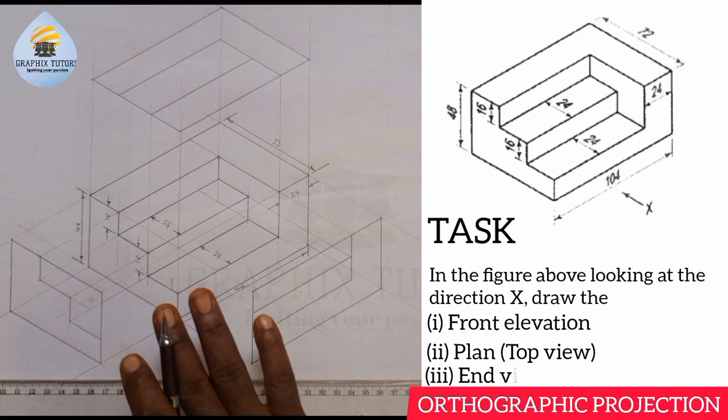In this video, we want to reproduce this figure you're seeing on the screen in orthographic projection. Now, we have already reproduced this figure on the screen in isometric in order to have a clearer view and understanding. Now, we'll be focusing on this particular view here, right?

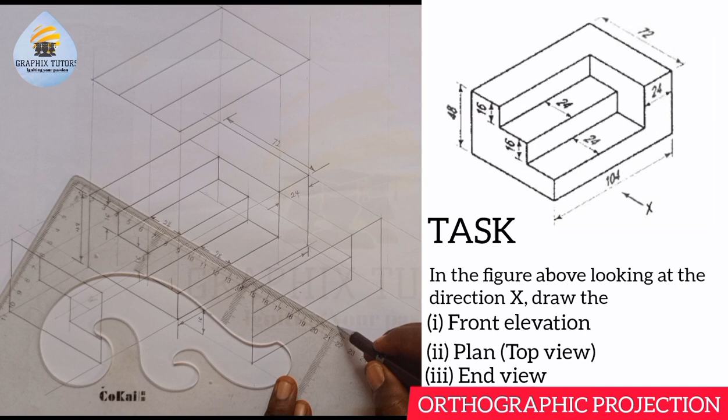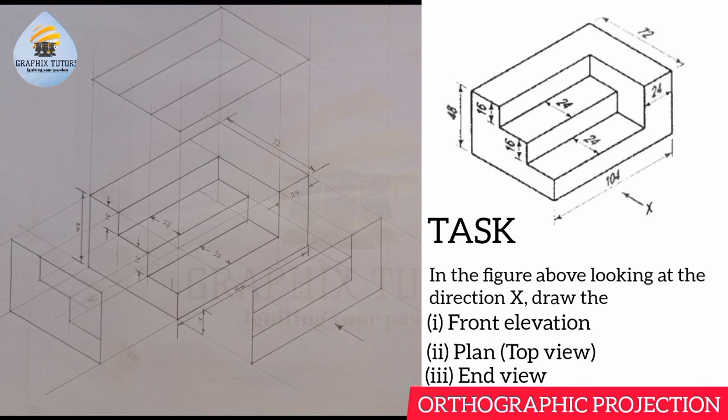Now, we're told to draw this in orthographic projection, right? Looking at the arrow at this what? At this arrow here. We're looking at this arrow, right? We're looking at it from this side. And when you look at this side, they're telling you to look what you see from this dimension here.

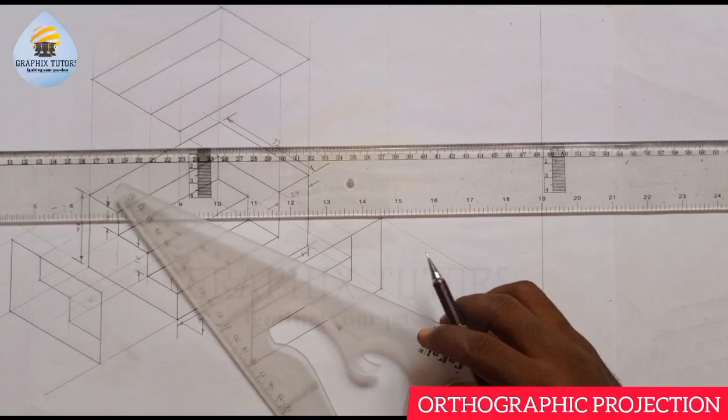So when you're told to draw in orthographic projection, the first thing that you should do is to draw your vertical this way. You can see that. And you draw your horizontal this way, right? You can see that. Now, what you do, you will now measure

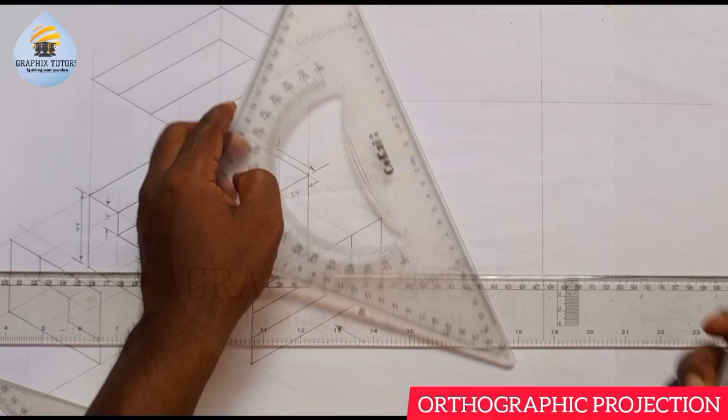5 millimeter to the right and 5 millimeter to the left, right? That means you take your meter rule and you place it, take your compass and you place it and measure. This is 5 millimeter, or you can use 10 if you want to, but I want to use 5. So placing this way, 5, I'll come to this point where they meet, I'll measure 5 to the left, 5 to the right, and we have 5 upward, then 5 downward. This is what I'm going to do.

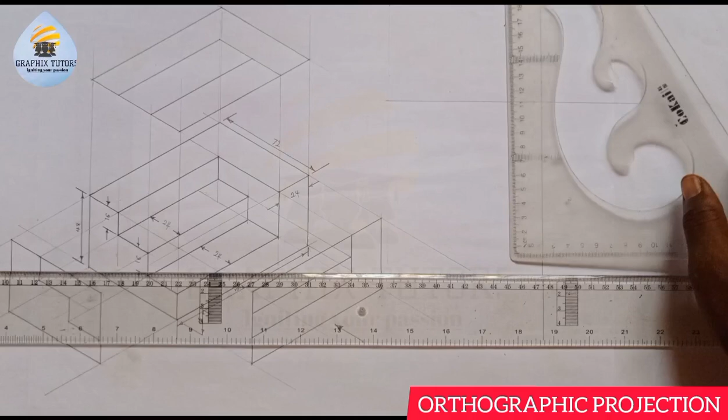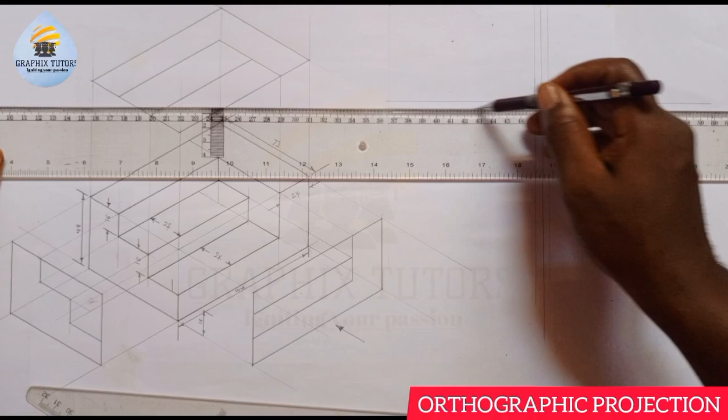So once I've done that, I'll draw a vertical line to pass through those points in this fashion. So I'll place this and I'll draw this. I'll place this and I'll draw this. And I'll take this and I'll draw this. Just faint line. Take this and I'll draw this. You can see that? So this is the first thing you will do when you hear the word to draw in what? In orthographic projection. All together.

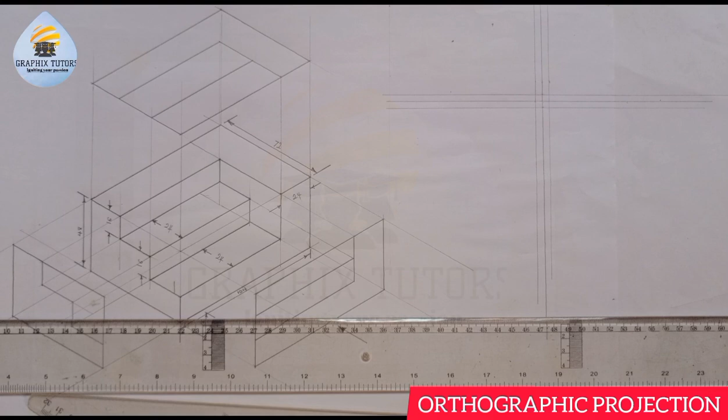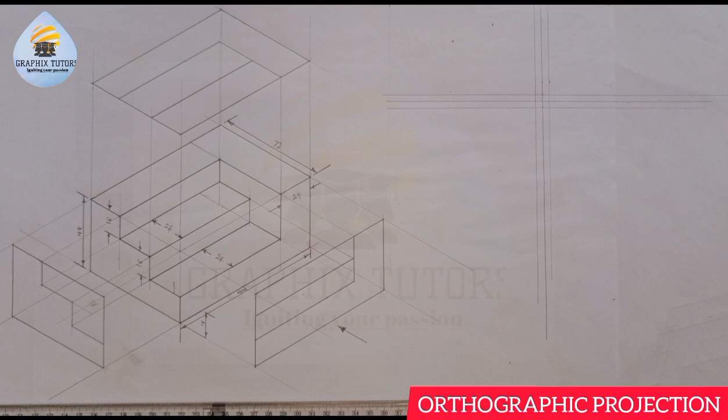Now let's look at something. We are told to draw the front elevation looking from this direction here, right? Now if you look at this direction here, and this is the figure you're considering, this is the figure in isometric. If you look at it, the question is, what are you going to see? Now, drawing the front elevation, if you're drawing the first angle projection, you start drawing from this quadrant, right? I'll call it the second quadrant.

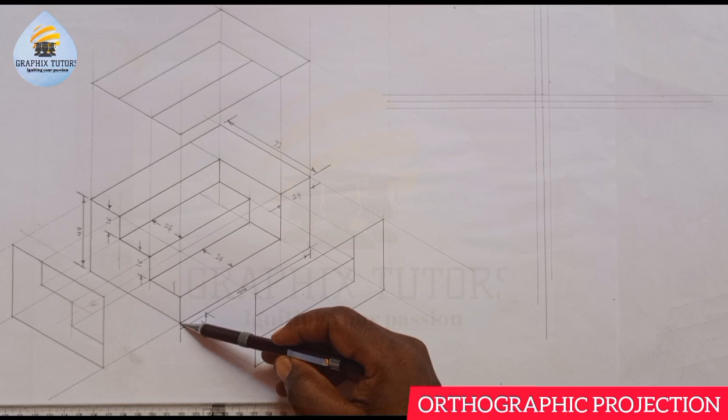So if I should do that, the entire length from here to here is given to be what? 104. So what I'll do is I'm going to measure 104 from this. This is where I will take my measurement from 0, right? This is 100 and this is 104 here, right? And the total height from here to here, which is what? 48. Now measure the total height of what? Of 48. From 0 to what? To 48. This is 40, 45, 48 here.

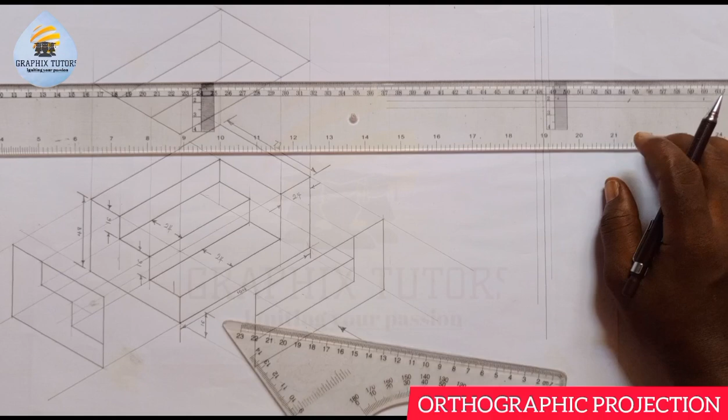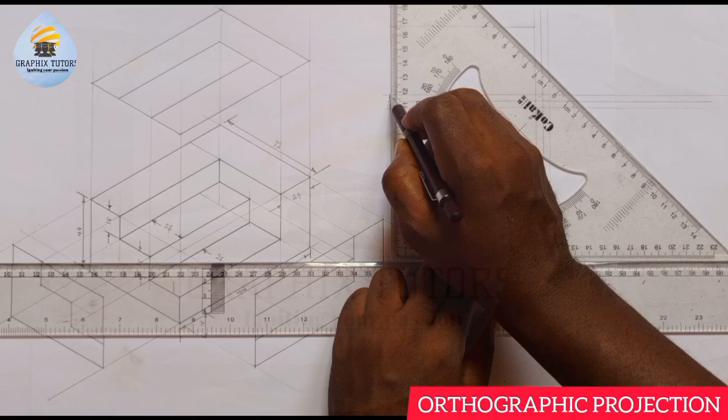All together, and I'll close it up this way. And I'll close it up this way. So this is the plane. Inside this plane we want to draw what we're going to see. Now, if you look from here, right, you see this end point here, which is this end point here. You can see that?

Now, you see from here to here, from here to here, from here to here, you'll be looking as if they are all on a straight line. You consider that they are all on a straight line since you're looking at it perpendicularly from this point. That is why from this point here, you see this point. This point here, you see this point. This point here, you see this point. Why am I not considering this one? Because this point and this point are on the same line. So this one will be blocking this. That's why I'm having only just one point, right?

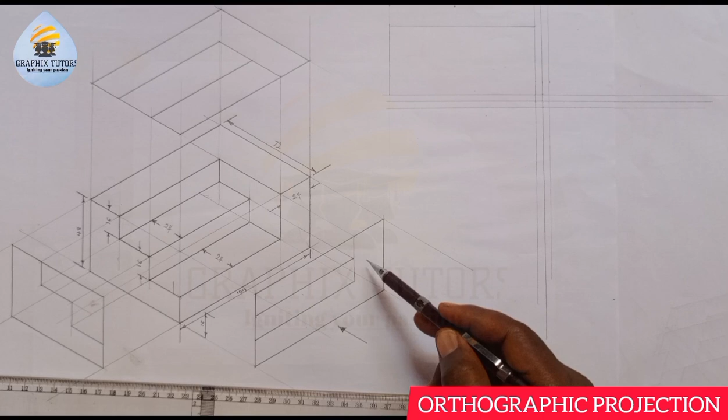This point and this point are on the same line. So this will be blocking this. That is why I'm having this point here. Then this point and this point are on the same line. So this will be blocking this. So I'm having only one point here. Is that okay? So this shape you're seeing, this L shape here, right? Is this L shape you're seeing here. Let me call it A.

And this is A here. Then this rectangular shape you're seeing here. Now this point to this point, right? And this point to this point, together with this point, they will all be on a straight line. You look as if they are all on a straight line. You're looking at it perpendicularly, so that's why I'm putting them on a straight line. This line you're seeing here, from here to here, is blocking from here to here and from here to here. That's why we're having just one straight line here.

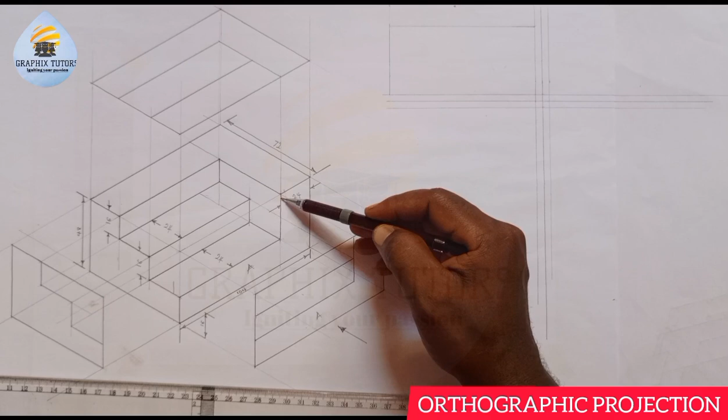You can see that. So I'm having this shape here, from here to this point. So this point is this point, right? So now from here to here, and from here to here, this rectangular figure you're seeing here, let me call it rectangular figure B, and this will be my B here. So if you're looking at it from this side, you're going to see this shape. You will not see the top. You cannot see this point here or this point where 24 is. What you'll be seeing is just A, right?

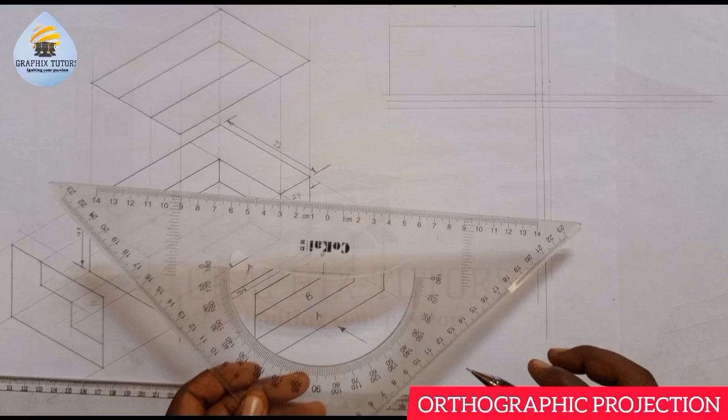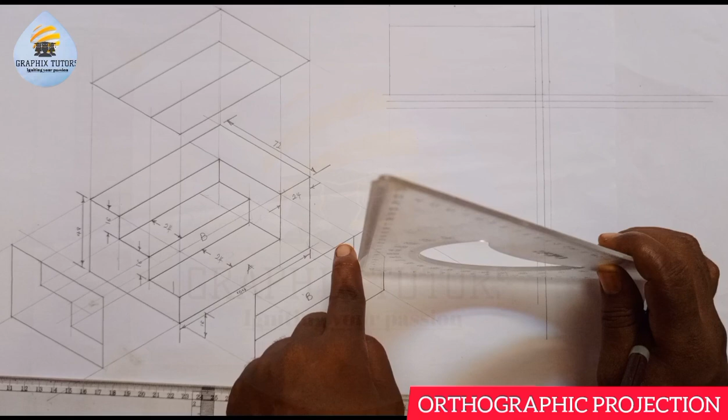Like now, if I'm asking you a question, if you're looking at this ruler from this side, what shape are you seeing? You'll be seeing a triangular shape, looking at it perpendicularly. You'll be seeing this semicircle here, looking at it from the top. Is that taken? But when I place it this way, watch. When I place it this way, this ruler, you're seeing this top here. You cannot see this down here because this top here is blocking this down here.

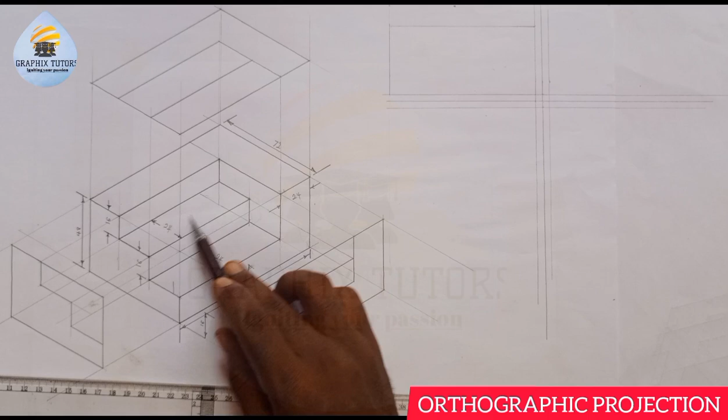So they are all on what? On a straight line. That is how you will be viewing it. Are we together? That is how you will be viewing it. Is that taken? You'll be seeing it that way. So let's proceed. The next thing I'll see here is this rectangular shape here. Let me call it my C. So this is C here.

So I'll be seeing everything here, which is A. I'll be seeing everything here, which is B. I'll be seeing everything here, which is C. Right? Then I'll be seeing this shape you're seeing here, which is what we're seeing here. So remember, everything will be in this rectangle. So this is what I am going to draw here. So you look at from here to here is 104, which is from here to here. That is 104.

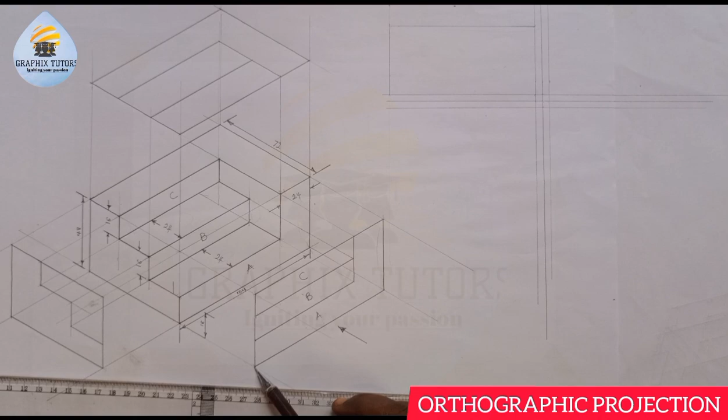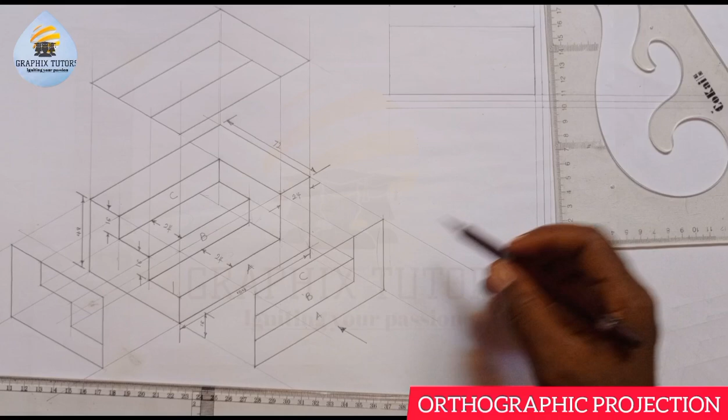So I'm going to take in that point. I'll take in that point. You can see that. Now the next thing is from here to here, which is from here to here, and I'll also take it in. Similarly, from here to here, which I already explained, is from here to this point here, because this and this, this and this, and this and this will appear as if they're on a straight line, right? That's why we're having a straight line. So I'm going to draw the straight line here. I'll take it in, right?

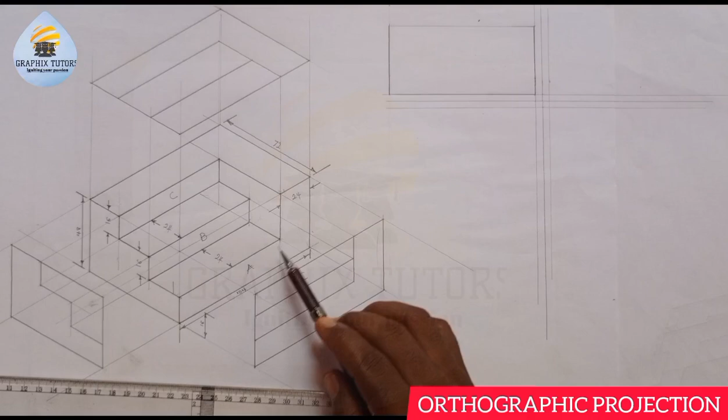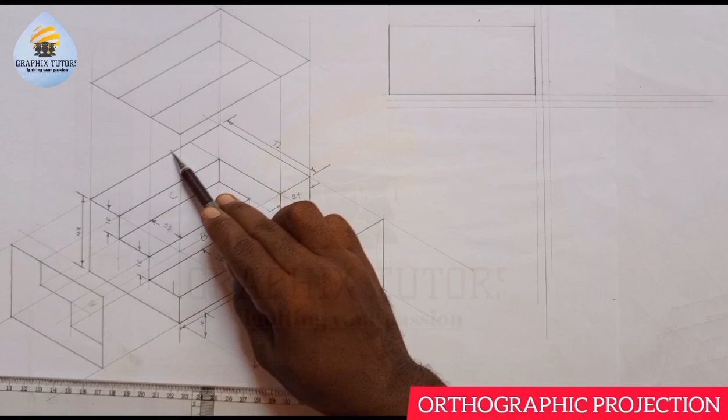Then the next thing is all this line here, from here to here, and from here to here will appear as if they're on a straight line, right? That's why I'm drawing this straight line here. And this straight line here, from here to here, and from here to here, will be blocking everything you have here. So I'm only having just one line because the front line is blocking the back line, right? So I'll just draw it this way. I'll take it in. Still the same thing, just like I explained.

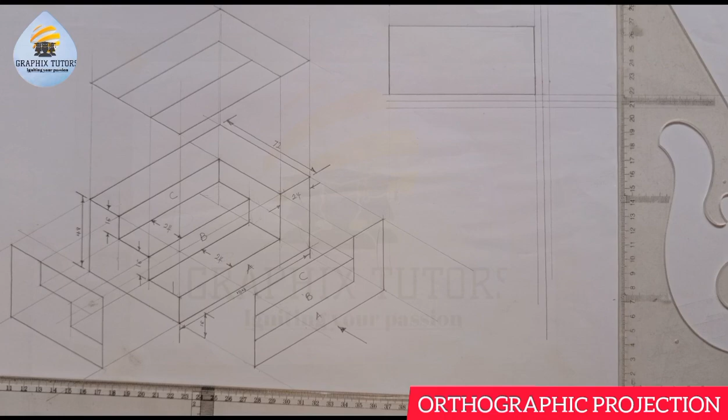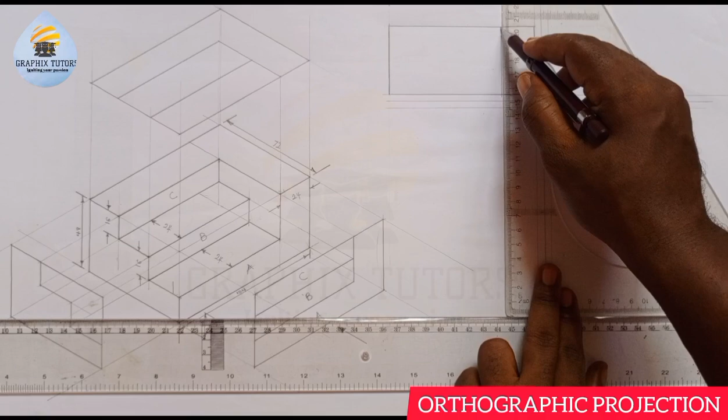You can see that. Now, from here to here is from here to here, and that is 24. So from here, I'll measure 24. If I do that, measuring 24, this is what I am going to be having from 0. This is 20, 24, right? And I'm going to draw a vertical line down. I'll draw a vertical line down, right?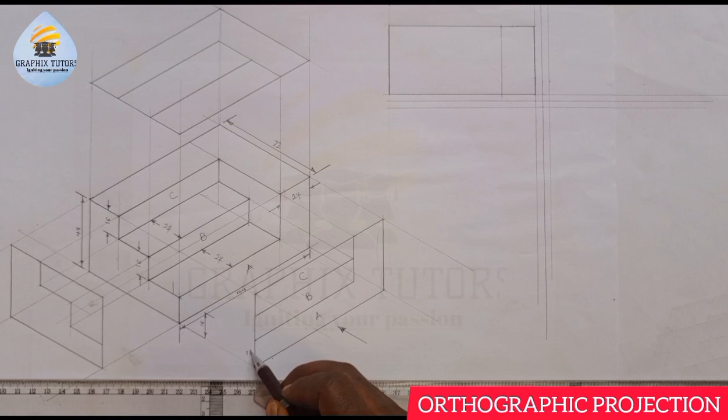Now once I've done that, the next thing is from here to here, which is from here to here, and the thickness is 16. Since from here to here is 48, once you remove 16 and 16, that is 32. 48 minus 32 means from here to here is 16. So from here to here we're having 16. Here to here also 16. Here to here also 16. They're all appearing on a straight line. That's how you'll be viewing them.

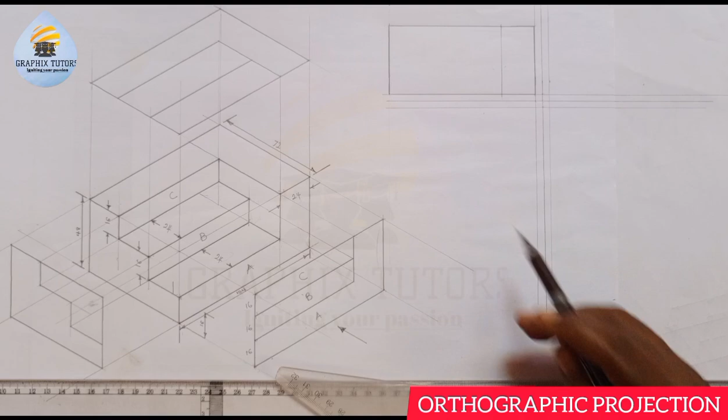That's why this point to this point is 16, and this point to this point is 16, and this point to this point is 16. You put them on a straight line since you're looking at them at a right angle, right? So I measure 16 upward. When I measure 16 upward here, from 0 towards this is 16 here.

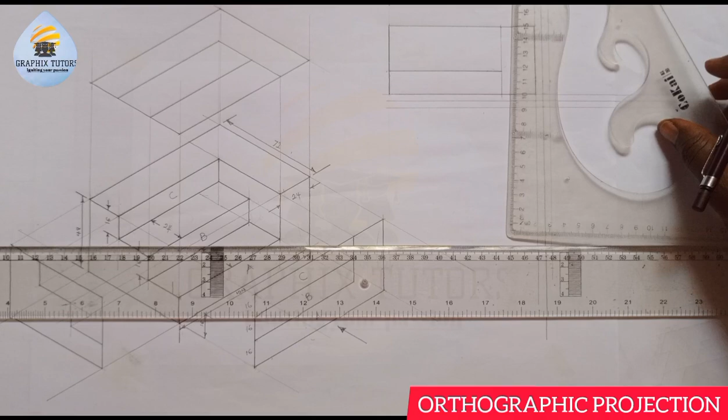You can see that. Then I will now draw my thick line here. From this point, I'll draw this, right? And I'm going to connect this to it from here to here. You can see that. So that is this L shape you see in here. From this point to this point, this point to this point, this to this, versus this to this.

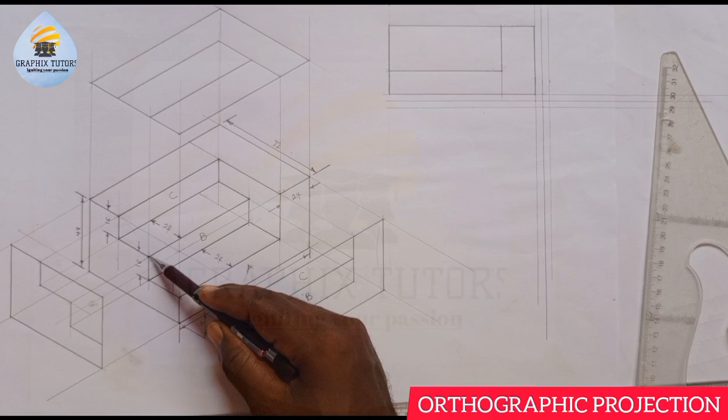Now the next one is again after you measure from here to here 16, from here to here 16, this point and this point is on the same line. So that means from here to here is 16, which is from here to here. So I'm going to measure 16 again. You look as if they are all on a straight line. So from 0 to 16 is here, right? And I'm going to close it up. So this is what we're going to be having here.

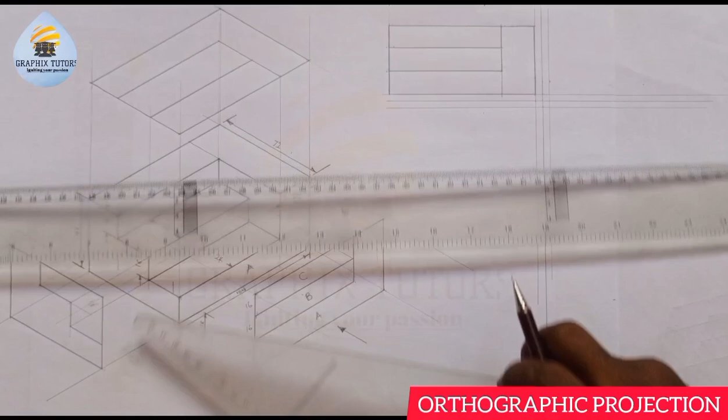Hope you can see that. So this is what we're having here. We have successfully reproduced this figure you see in here. So it's very important for you to bring out your dimension. We know that from here to here is 16, from here to here is 16, and from here to here is 16. The entire height here is what? 48. So you do your dimension. Is that okay now? From here to here is 104, right? And from here to here is what?

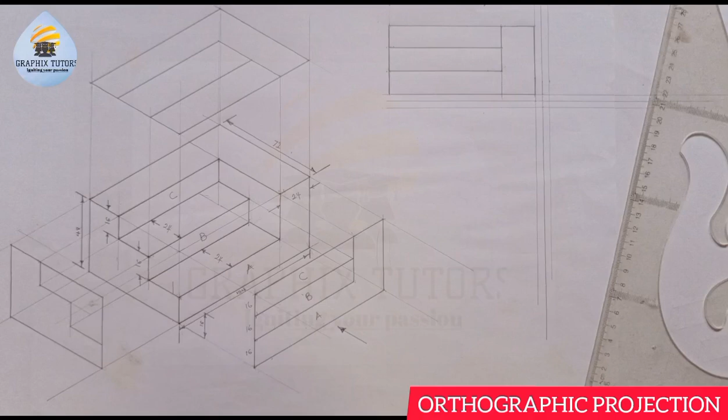24. So let's proceed. So since we have successfully drawn out the plan, the front elevation, looking at the arrow, we are looking at this arrow here. This is what you are going to see. We'll call that point our front elevation. Now the next thing after the front elevation, that is if you are drawing in first angle projection, your front elevation is here. The next thing will be what?

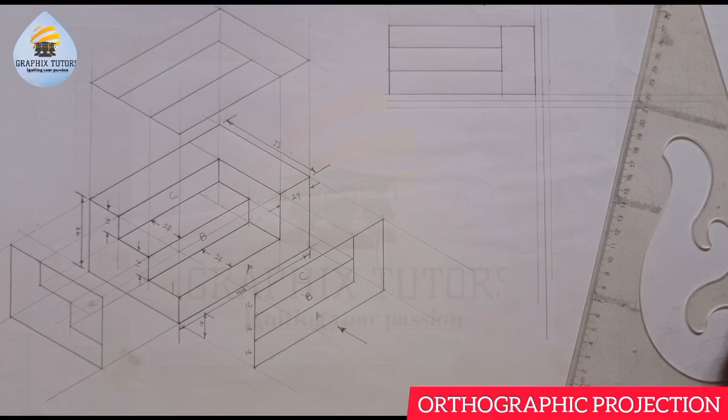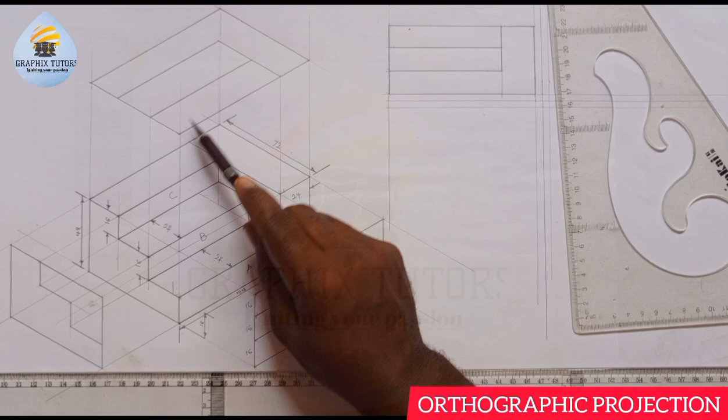The plan. So if we are to draw the plan, what you do is you're going to project this axis out. You project them down, that is this end. This end is already there. Now we know that from here to here is 104, right? Meaning that the plan is looking at it from the top. When you're looking at it from the top, from here to here and from here to here they are both 104. So the length of the plan is the same as the length of the front elevation.

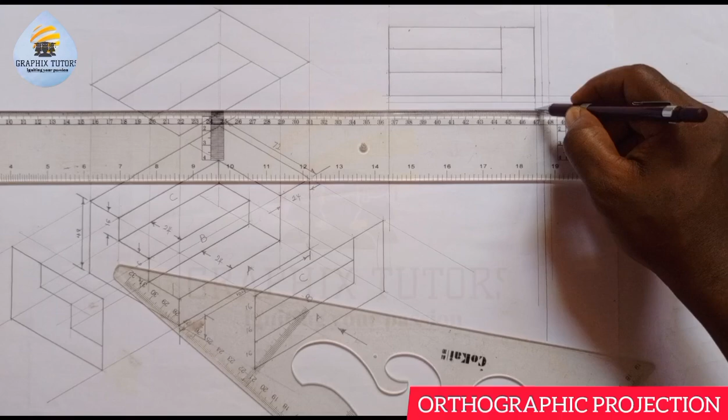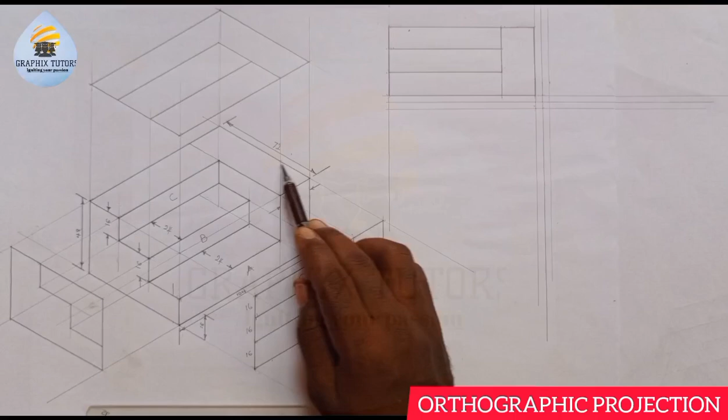So since from this point to this point is thickened, I am going to just thicken this way, or better still, I just draw out my plan. From here to here is 104. Since it's a rectangle and two opposite sides are equal, if from here to here is 104, meaning that from here to here is 104, right? So the other side that we don't have is from here to here, and that is 72. So the height of the plan here is 72, which is the width.

So I'm going to measure 72. So from 0 here, this is 72 here. You can see that. Then I'm going to close it up. So in closing it up, I'll have this way. So this is the rectangle which we want to draw in our shape. What you need to understand is from here to here is from here to here, right? And from here to here is from here to here. And they are all thickened on the four sides.

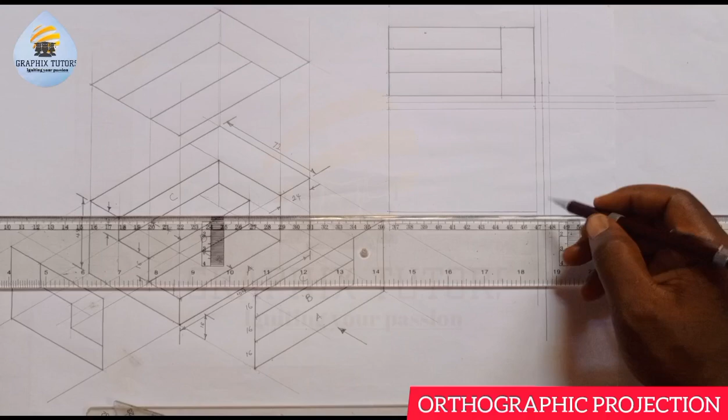So I'm going to draw it. I'll thicken all those four sides here this way. I'll thicken this four side this way. I'll thicken this four side here in this way. Thickening this four side here this way.

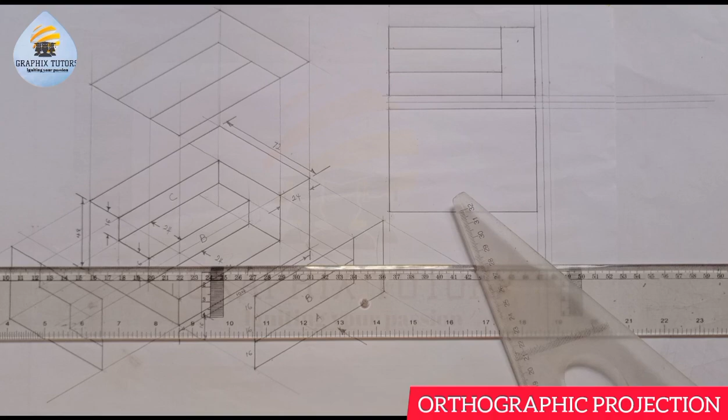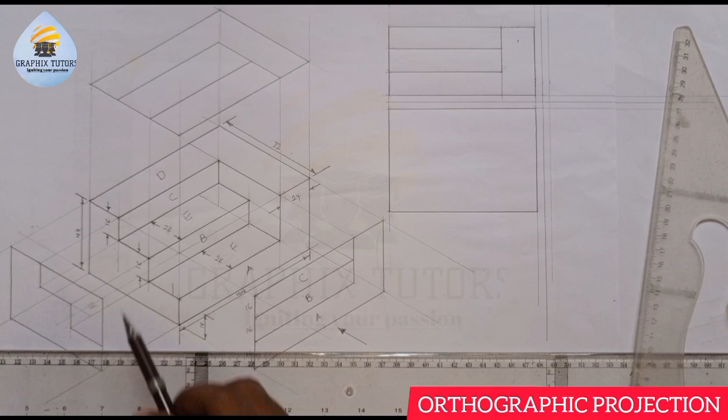Can you see that? Now if you're wondering what am I doing here, looking from the top, what are you going to see? All this side here you're seeing, let's call it D. You're going to be seeing D, right? And all these corners here to here, I'll call it E. All these points here, I'll be calling it F, right?

So what will happen is from here to here and from here to here, we see them as if they're on a straight line. Since you're looking at it from the plan perpendicularly, from here to here is 16. They're on a straight line. So what is the thickness? If from here to here is 24, that is F. From here to here is what? 24.

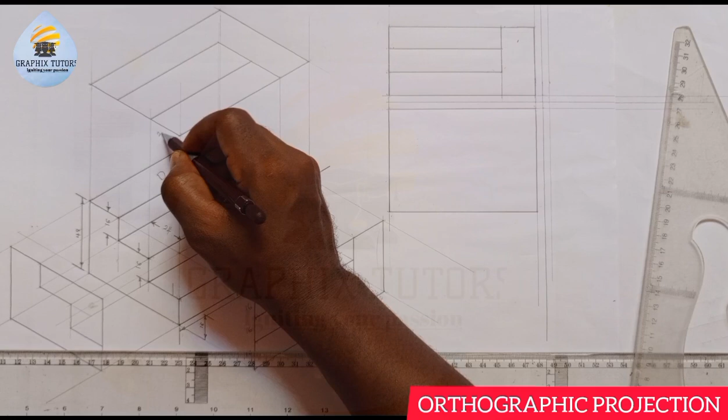The next one also is what? 24. Automatically the third one, which is D, is also what? 24. All together. And here also, from here to here, is also what? 24. You'll be seeing them as if they're on a straight line, right? This one now, from here to here, and from here to here, and from here to here, you see them as if they're on a straight line.

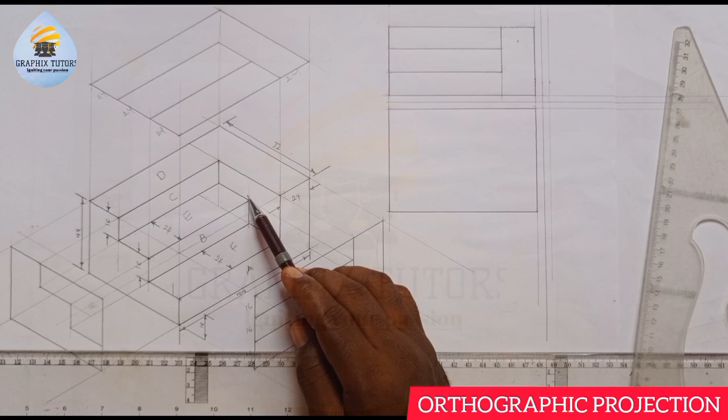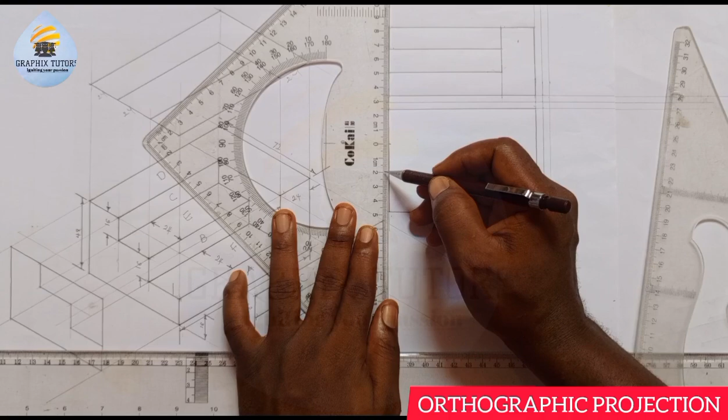So if I want to do that now, I'll just measure 24. That is, from here to here is what? 24. And this end here is this point here. So I'm going to measure 24. So from 0, this is 20, 24. I'll do another 24. From 0, this is 20, 24. And the third one is what?

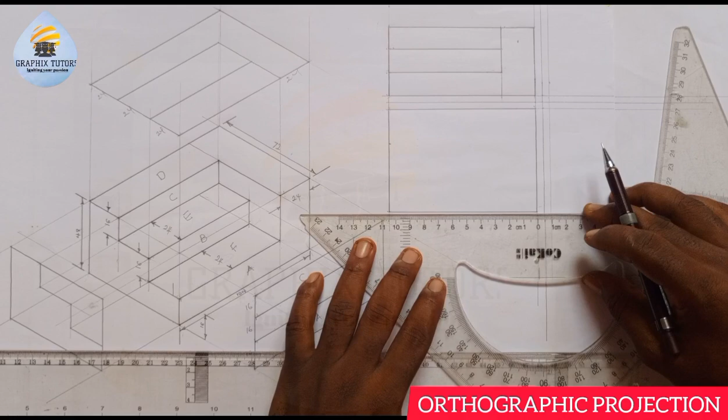Is 24. So what I will do is, I'll just draw another one again. From 0 here, from here to here. From this point to this point, which is from this point somewhere around here. So I'll measure 24 from here. So from 0 to what? 24. This is 24. Right? So I'll just draw my vertical line upward. I'm going to do what? I'll draw my vertical line upward.

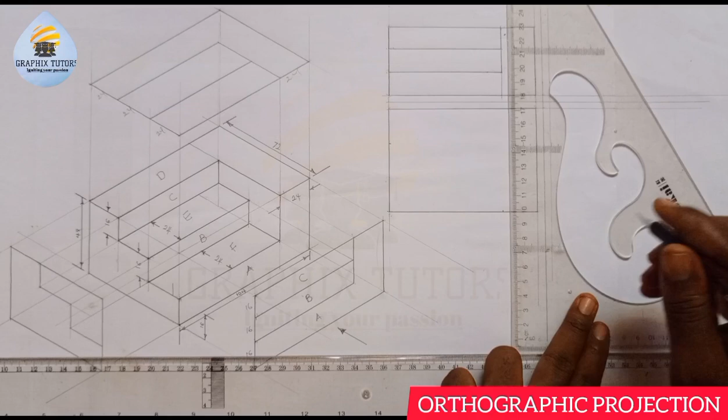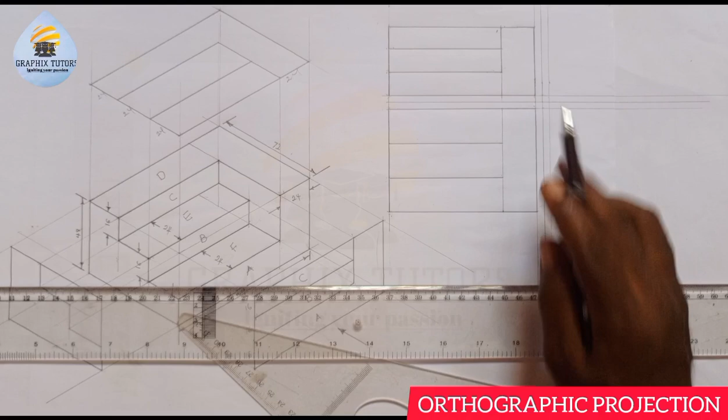If I should do that, I'll have this. From here, faint line, then I'll just cover the 24 I measured. From here to here, 24. Then from here to here, another what? 24. Remember that this thickness from here to here is same as from here to here. So what we'll just do is, at this point, I'll just take it in here and I'll stop here. You can see that? And that is all.

So this is what we have here. The L shape you're seeing here is this L shape here. This long line you're seeing from here to here is blocking this to this and this to this. You're only seeing the top. This is the top, top, and the top. Alright? You cannot see A, you cannot see B, you cannot see C, just like you're having a staircase.

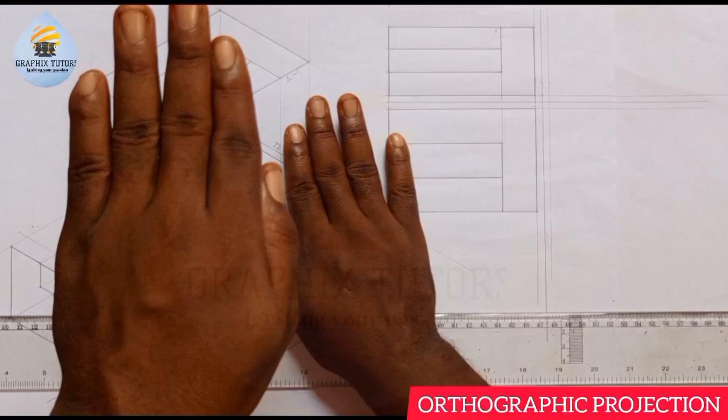If I place my hand this way, right? You can see my hand, then put it this way. I place my hand this way. You can only see this part of my hand, and you can see this part of my hand, right? But you don't know what is in between. You don't know what is at this side here. You can only see it this way. That's what's really happening. So looking in from the top, you can only see E, D, and F. You cannot see B and C, then A.

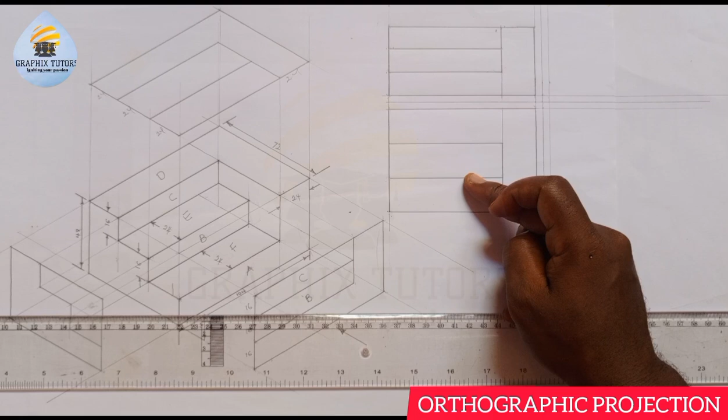All together. So this is the front elevation, and this is the plan. Are we good now? Front elevation, plan, because it's in first angle projection. That is why the front elevation is here and the plan is here. Assuming it is in third angle, this front elevation will come down here and this plan will go up here. Are we together now? Now we'll move forward.

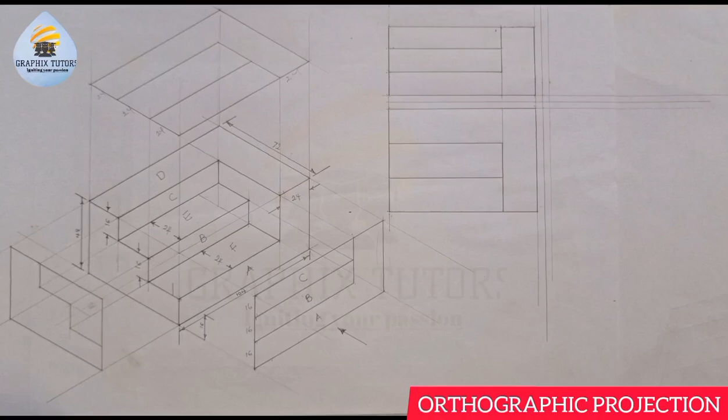So from here, the next thing we're about to draw is what? Is the end view. The end view is looking at it from this side. Right? Since this is the front elevation, automatically this will be the end view. The plan doesn't change, the plan remains constant. In whatever direction you're looking at the figure, the plan remains constant, meaning the top view.

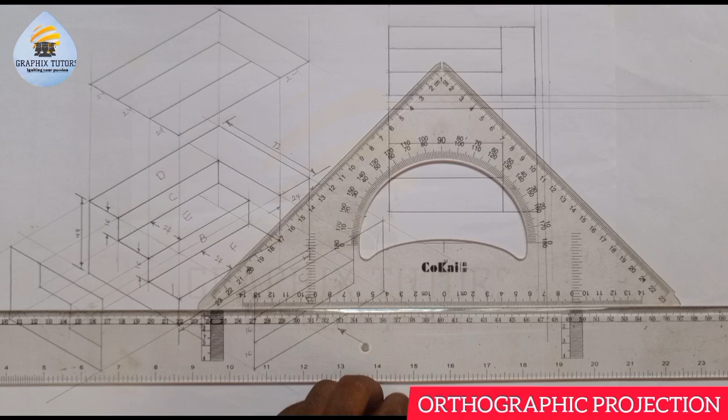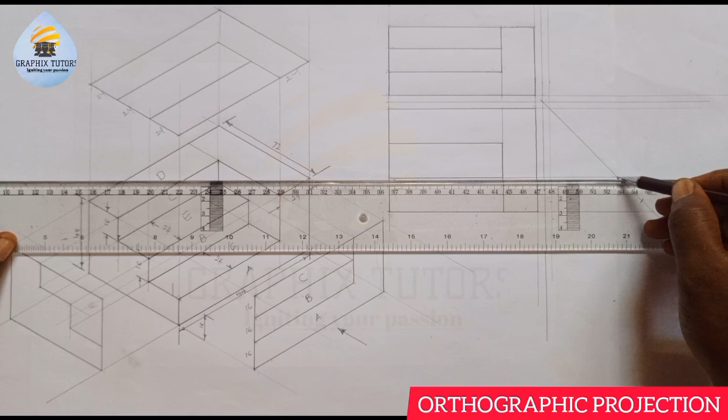So I want to draw the end view, right? That is this figure. The first thing I will have to do here is to place my 45-degree set square and locate the center of this figure here. So I'll just draw it out this way. Can you see that? Then I'm going to project each of all these ends, right? Project this end to this point. I'll project this part to this point. I'll project this part to this point. So the highest point here, I'll just draw it out this way.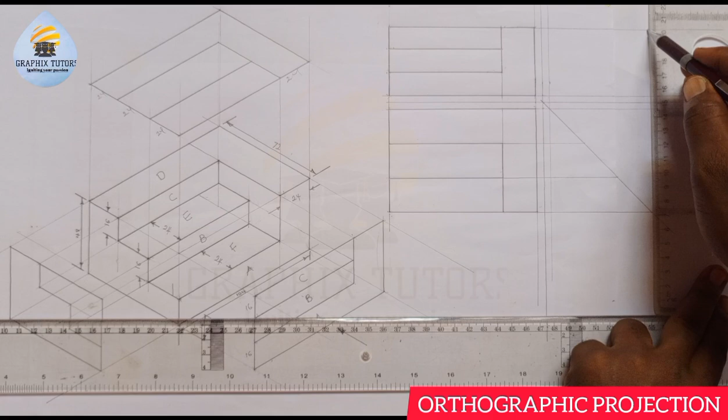So once I have done that, I will now project those points upward where they meet. So if I place my meter rule this way, where they meet here, I will take it up. Faint line, where they meet here, I'll take it up. Faint line, where they meet here, I'll take it up.

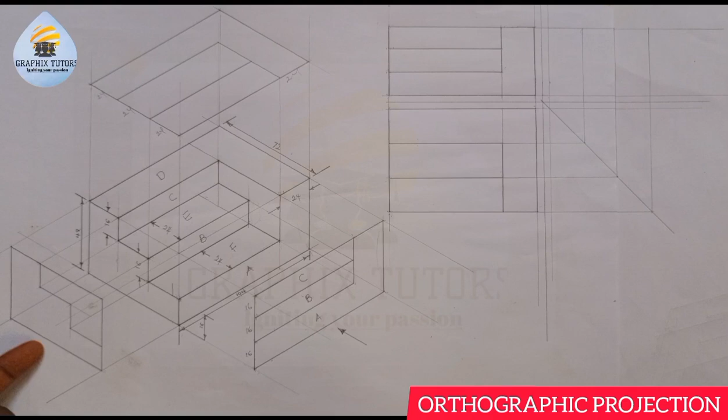Faint line, right? So the next thing I'll do is the entire length from here to here. You can see when you're looking at it from this part here, you're seeing the entire length L shape here. The length of the front, the end view, have the same length as what? As the plan. Let's call it the width. From here to here is what? 24 plus 24. That is 48. Essentially saying from here to here.

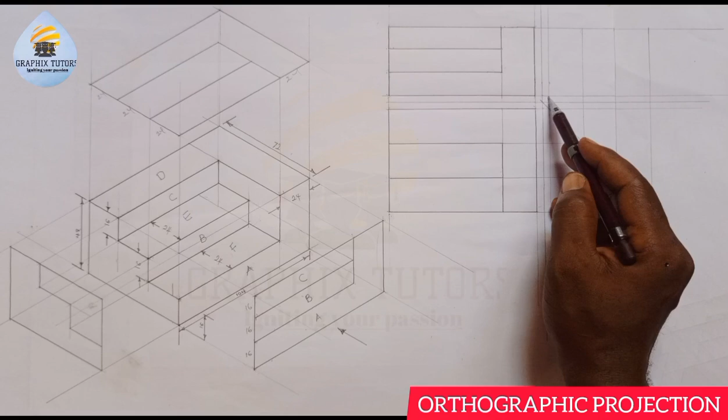So meaning that from here to here, which is from here to here, is the same thing as saying from here to here, which is from here to here. Because if you look at it, if you trace it, these two thicknesses here. So I'm going to take in that aspect there. I'll take it in this way, right? And the height from here to here, which is still the 48 we have there, right?

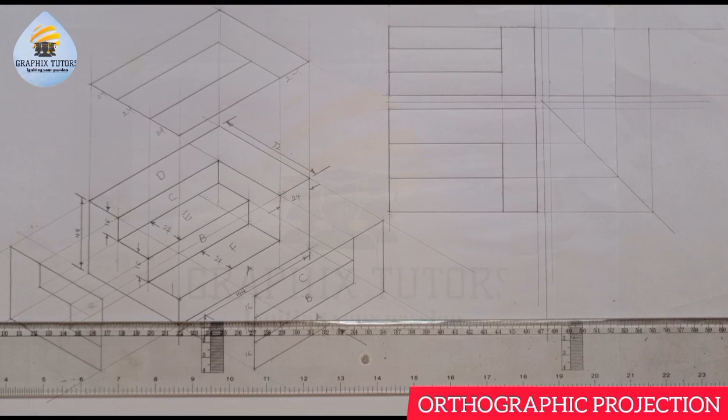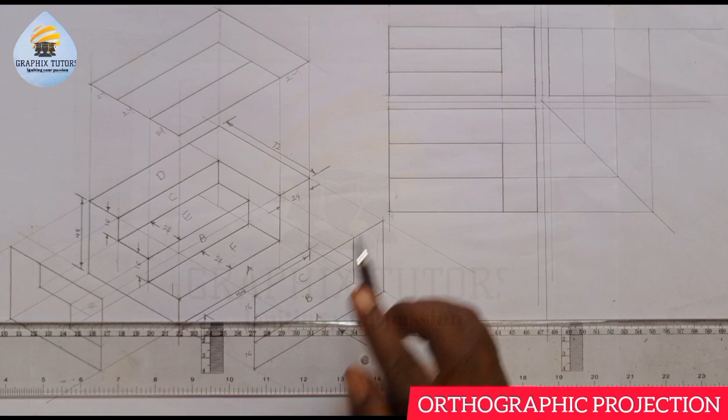I'll come here. I'll take it up. There is 72 here. So I'll measure 48 here. We know this side here is 72. So this summit here is 72. Remember that. Now from here to here, which is from here to here, and that is 24. So you don't have to stress yourself. From here to here, you can see that it's given to be what? 16. I'll just project it here.

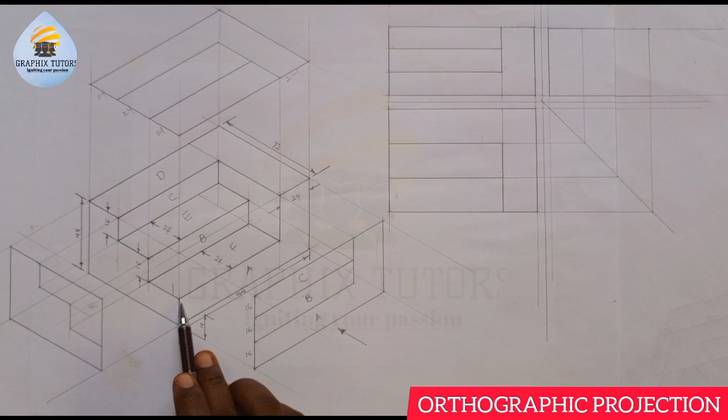Look at what I'll just do. Connect these 2 points, everything here to here, right? Which is from here straight down. When you're looking at it from this side, you see this point to this point, this point to this point, this point to this point, right? You'll be seeing them as if they're here. From here to here is from here to here, from here to here is from here to here, right?

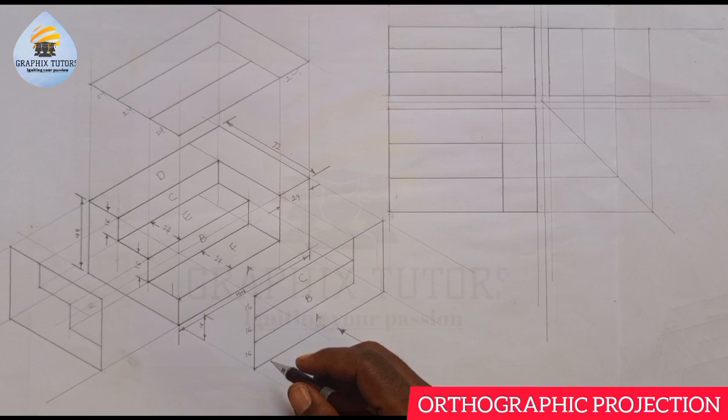Then this straight line here, it is at this end, but you will see it as if it's at this point here, just like what I showed you here. So these 2 points, you'll be seeing it as if it's at the beginning of the line. That's why I'm placing it here all together. So what I'll just do is I'll project this point here. I'll project this way. So what I'm actually looking for here is this, taken from here to here. Then the next point, I'll project it also from here to here. What I was taking is this point to this point, right?

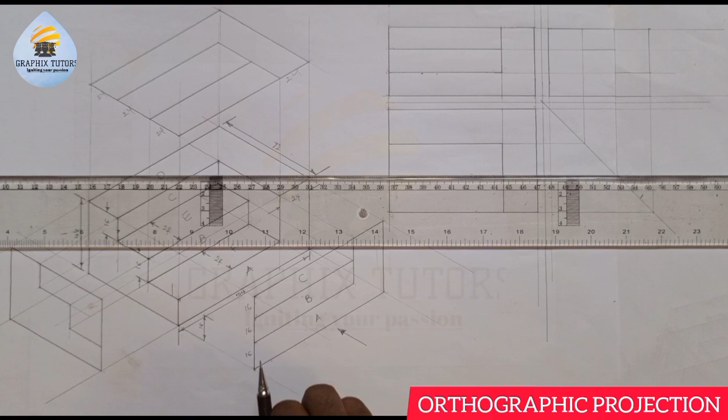Then I'll just wrap it up. I'll just close it up. And I'll just draw from here, straight and up. So this is what we have, right? If you see in this figure where you're looking at from here, that means from here straight down here, that means you'll be seeing here and here, right? And here as if they're on a straight line. As I'm putting them on a straight line.

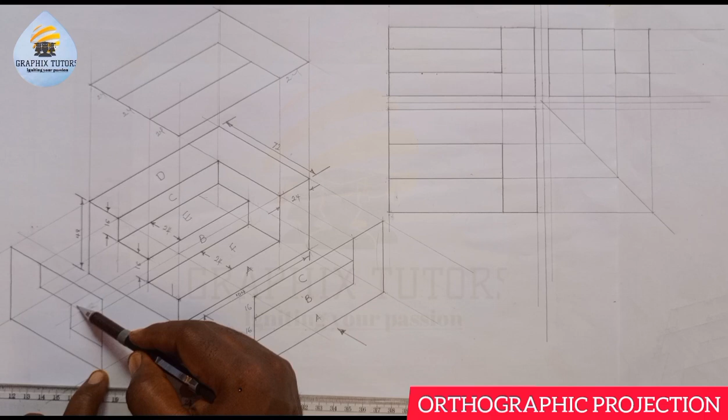Then you'll be seeing here to here, which is here to here. You'll be seeing from here to here and from here to here as if they're on the same level. That's why I'm putting from here to here, which is from here to here, and from here to here, which is from here to here. They'll be on a straight line. Since you're viewing it in an orthographic projection, altogether now, you're viewing them on a plane. So whatever you're doing must not go out of the plane. So this is what we have here.

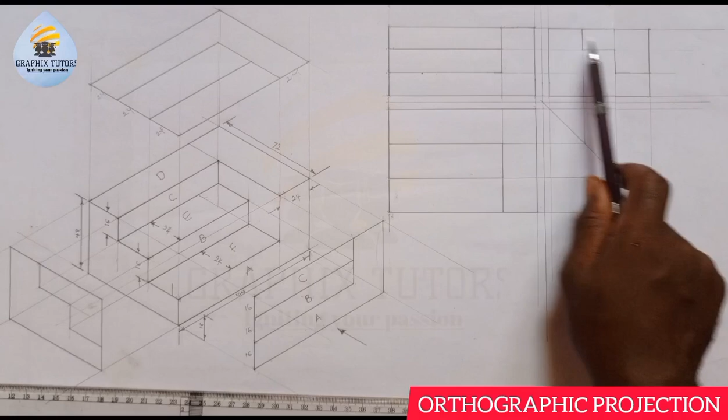So remember, this is in first angle projection. If it's in third angle, these two views will come down here, while this will go up here. So you'd have to draw your 45-degree here, to be in this direction here. So this is what we have here.

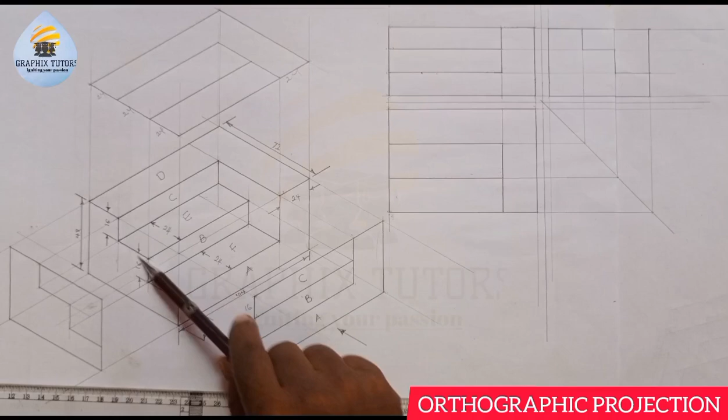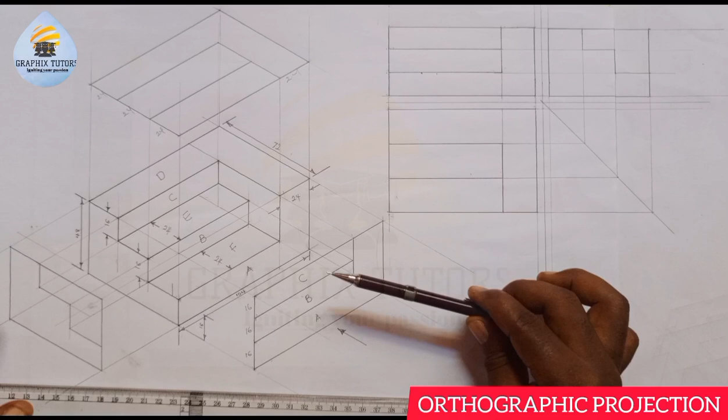So the front elevation, the plan, and the end view. So this is how you can transform an isometric projection into an orthographic view. You don't have to do all this. Why I'm drawing all this is to give you an insight of what you'll be expecting, right? To give you an insight of what you'll be seeing when you're looking at different dimensions. Why is it 3-dimensional? Because isometric is a 3-dimensional view, in which you can see the front elevation, the plan, and the end view.